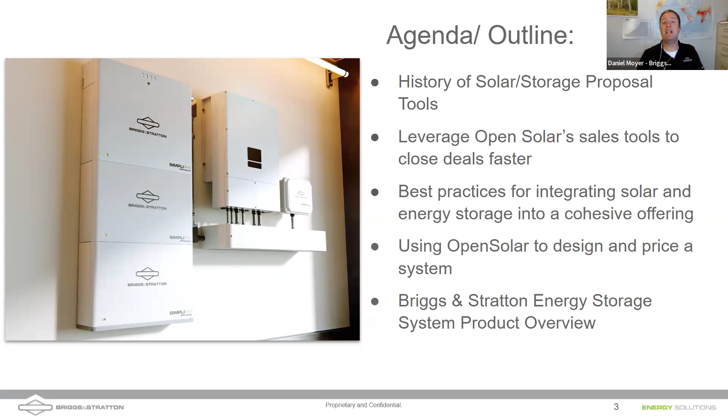So really quickly, the agenda, the outline: we're going to talk about the history of solar and storage proposal tools, how you can leverage OpenSolar's tools to make deals happen and close deals, which is exciting for everybody in this busy industry trying to get onto the next job. Best practices for integrating solar and energy storage together into a cohesive offering, and then Andrew is going to walk us through a demo of the tool. I'm really excited to look at that and go through that. Then we'll end by looking at some of our products here at Briggs & Stratton Energy Solutions, not only our batteries, but also some of our generators as well.

So Andrew, you want to walk us through a little bit on OpenSolar and your history? Yeah, thanks Daniel. OpenSolar, we've been in business globally for a number of years, but in the US we've been active since about 2020, 2021. We're the world's leading solar design and proposal software, currently used in over 150 countries globally. We have teams in Australia, the UK, Europe, the Philippines, and of course the US. What's really unique is we've got a coast-to-coast US sales and support team, but being a global company, we provide truly 24/7 global support coverage for our platform.

What's really unique about us is that we're free of charge for the installers. We've got a lot of great partners and manufacturers, groups like Briggs and Stratton who help support OpenSolar, but we're free for the contractor. The way we generate revenue is integrations and partnerships, so finance deals run through the platform, or permitting and engineering services. There's a lot of different ways we generate revenue, but the great thing for installers is it's free. If you utilize any third-party services, it's the same relationship or program you do today, you're just doing it inside OpenSolar. So there's no extra hidden fees or cost - we're truly free for the installer, which is really unique.

But more importantly, we really focus on the community. Here at OpenSolar, we're built by solar professionals for solar professionals. Our CEO, our co-founders, a lot of our staff have decades of industry experience, and we're always taking in the feedback you guys see and experience on the platform and constantly iterating and evolving it for you. So as you get to learn the platform, let us know your thoughts, and we're more than happy to take that feedback and continue to make it better.

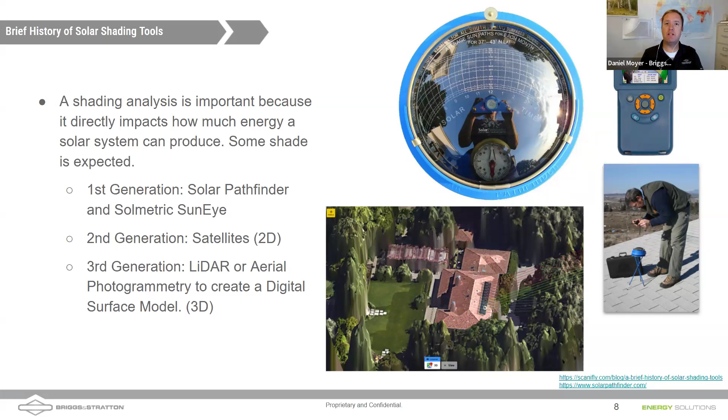And you can see in that bottom picture some of those rays coming off the solar panels. Some are green, some are red - that's showing you where you're getting shaded. Andrew is going to share with us later how you can adjust that. So we've come a long way, really exciting.

And what does that really mean for us? It's these new tools like OpenSolar - it's going to streamline the process, it's going to really make these proposal creations go a lot faster. There's a lot of really cool ways that we can engage the customer. They can look at different proposals, and you as the installer are going to be able to look to see their engagement and get live feedback.

Did they click on it? Did they view it? And I think really what we were getting at with some of that imagery is it's accurate now - not only is it accurate for the shading, the production values, but also to be able to accurately show the financial payback as well.

So what do they get? They're going to be able to size the system, we're going to be able to put in our cost estimation, which is then going to be able to look for any sort of potential incentives that are available, and you can add those into the proposal, model that energy savings so that the homeowner has an accurate proposal. So you're not just promising everything - they're going to see when that payback is probably going to happen, that return on investment as well.

I think what made these really cool, Andrew, is with this new 3D LiDAR you kind of get a picture of your home, or in this case what we're looking at is a picture of a business. People love that. And Andrew's going to show us here - you can actually right click and kind of look around and visually look at the house. People love seeing what the equipment looks like on the roof, so they get a great idea of what it can look like.

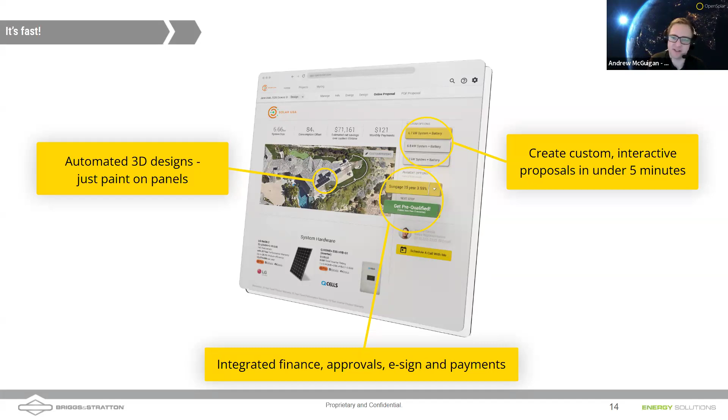And in the proposal, right where you show the solution to your customer, you can sign your contracts. You can actually do all the loan application, credit check, and even get the approval right there in the tool. So you can e-sign all that and even process those payments. Again, it's just a one-stop, really simple place to show your customer the journey, educate them, and hopefully close them on the sale.

Yeah, and that's what's really cool is that you can do this through the homeowner and see what they're clicking on, see what they're taking a look at as well. So one thing that we think about is how accurate is this information, right?

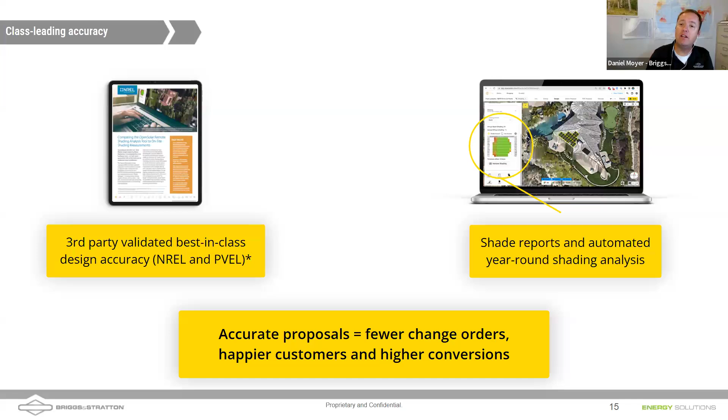And you guys have a really cool couple of third parties, right? We don't have to believe Andrew's word that these things are accurate. Why? Because you guys went out to NREL and PVEL, and you had not only the accuracy of the modeling, right? Is the roof that actual size? Is that tree actually that tall? You were able to show that, and then also be able to model the shade.

And so there's really cool white papers here. And again, everybody attending is going to be able to have links to both of these. These are clickable links, and you can jump in there and read a little bit more about how you guys were vetted by these two reputable organizations to make sure that what you're presenting is accurate as well. So it's an all-in-one, right, Andrew?

Yeah, thanks, Daniel. So again, all on one platform, right? So trying to just create that ecosystem of services for the installer in one place. So we have a CRM that's built in there. We also have the ability to connect OpenSolar with other CRMs, accounting software or software platforms through our Open API, which is publicly available online. It's a web-based browser. That's what you'll see today.

So great for your desktop or laptop, but we do have OpenSolar available in the App Store. So if you want to take this out in the field on your tablet or mobile phone, you can do that. It has all the same functionality and features you get on the computer. And then Daniel mentioned this earlier, but there's a lot of great post-install documentation. So site plans, shading, bankable shading reports, user manuals, install packs. You can even create your own custom documents. So permitting docs, interconnection docs, all that kind of stuff you can create in OpenSolar and even send it out for signature through the app.

Yeah, it's not lost in your computer hard drive, and then somebody else in your team can't find it, right? It's all in one. It really keeps it organized. It helps move it faster, right? So, again, you can do it in person. You can also do remote selling because the homeowner has an interactive proposal. Some people still like a good old printed piece of paper, right, Andrew? And you can still do the PDF and print it out and bring it to the homeowner as well.

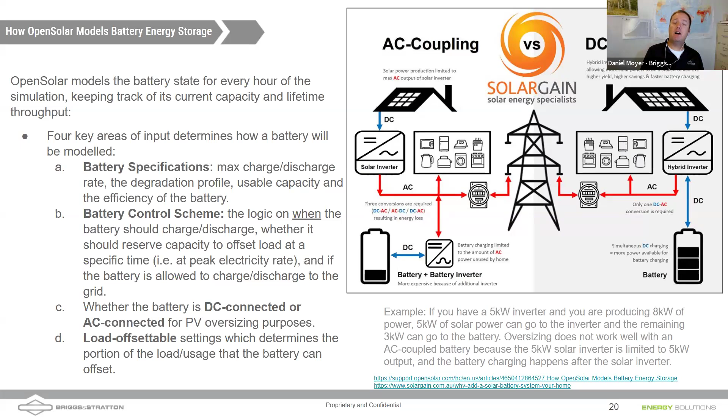Another thing that's really cool you look at is, right, what's the offsettable load? Are we backing up the whole home? Are we just having a critical load center? And then also additionally, how much of that load demand we can offset based on the power of our system.

So Andrew, really quickly, what are we looking at, right? We're looking at the battery control scheme. We're going to tell OpenSolar how we intend to program the inverter. So maybe quickly walk us through some of these different schemes, knowing that there's more available, and there's also customizable battery schemes as well. Is that right?

Yeah, exactly. Thank you, Daniel. And it's all about telling the battery when you want it to charge and discharge and interact with the grid, and especially the utility rate that this customer is under. And it's going to vary based on the state and location, which one you want to use, right? So you got a couple options here. I'm going to highlight this first one for self-consumption. It says in most cases you want to select this battery scheme. I would actually argue there's a lot of cases where you want to be selecting the maximize savings option, and I'll kind of explain why in just a moment.

Self-consumption is trying to mainly protect the energy within the home, right? So you're trying to charge from any excess solar generation that's remaining after you've offset the load, right? So essentially you're trying to fill in the appliances in the home first and use the solar energy for that. And the excess is going into the battery until the battery is full. And then once the load is greater than the generation and the battery's been filled, it's going to discharge to meet any load after that self-consumption.

So if you basically have additional load you got to cover once the solar stops producing quite as much, the battery's discharging to meet that load. And then afterwards, anything else is going to be sent to the grid, right? So it's really trying to focus on storing energy in the battery, covering the load in the home, and then discharging after the fact, right?

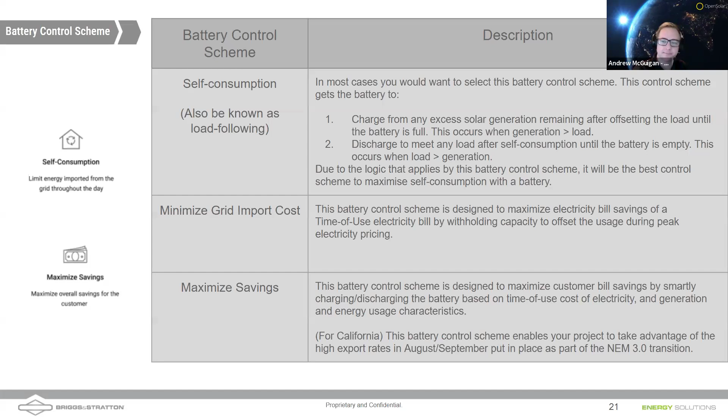Yeah, and I think it's really important, right? You can put this into the OpenSolar model, right, and model this, but it's really important that you, the installer, then program the inverter to behave in the way that you've identified here. And I do know that Sol-Ark and a lot of the other inverters have very powerful controls that allow you to program that Sol-Ark or other piece of equipment to do what you're saying you're modeling to do there. So really cool, awesome.

So what we're going to do is Andrew's going to demonstrate here in a second, but what do you need to know ahead of time, right? You need to have of course the homeowner's name and address, their energy usage, and more importantly their utility rate. And also you really need to know what utility rate they're going to be forced onto after you have done your interconnection agreement as well. We're going to do a system design and sizing, that financial analysis. We're going to create a proposal. We're going to get a contract signed, and we're going to get our money as well.

So, Andrew, why don't you go ahead and take over here, and we'll go ahead and look at your demo really quick. Oh, sorry, I was trying to mute myself there, but sounds great, Daniel. Thank you. I'll take it over right now. And keep any questions coming as Andrew's changing us over here. Awesome. All right, great. You can see my screen there, okay, Daniel? Yep. Perfect.

So yeah, we are in the OpenSolar environment here. There's going to be four main zones here to OpenSolar. I'm going to highlight those really quickly, and we're going to focus mainly on designing, selling, proposing with batteries and with Briggs Stratton products.

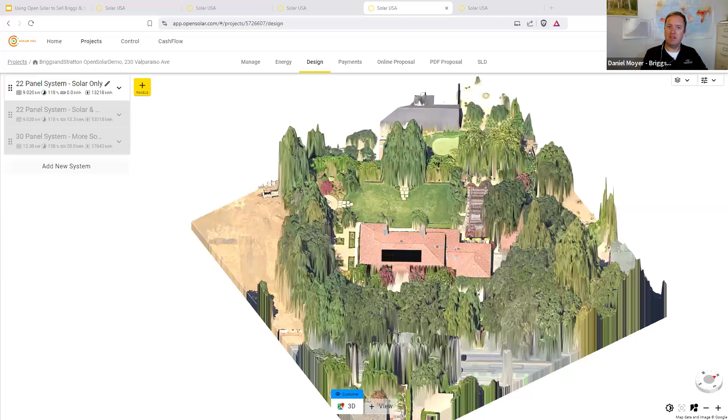Yep, thank you. Exactly. So I've got three pre-built systems here. We're going to take a look as if we were doing this from scratch. So I'll start a brand new system. You just hit the add new system button to do that. Before I get started, I like to highlight that I can right click and hold to move around, or zoom in or out with the scroll wheel on my mouse. You've also got the compass down here that allows you to do that, and you can do that with the plus and minus buttons. The shading icon here will allow you to toggle that on and off so you can see a nice thermal heat map of the property to know the best roof faces to design the solar on.

When I'm ready to design, I just hit the drop down right here. I've got these tabs across the left to build. So I'll choose my modules here. Let's choose one of our partners, Panasonic. We'll choose the panel company. Again, this is my demo account, so I've got a bunch of different options in here. Usually you'll just have the 4 or 5 that your team is selling with. But once I select the panels, I just hit the plus panel button right here, choose portrait or landscape. You'll see the module come out as it's following the roof. And all you have to do is left click to place it, left click on these boxes, or left click and drag, and that will build out the array.

You also have the ability to draw out the roof. There's an auto layout, auto design feature. We also have a straight up AI coming pretty soon, but you have a lot of different options here to help you with that auto design. Now, once you've built this, you've got the ability to flush mount this. You can do a single tilt or a dual tilt if you've got a flat roof. You can also do ground mount systems on here as well. It's pretty easy to do.

You can do carports in OpenSolar, and you've got the basic settings or the advanced settings if you really want to split out columns or rows or set up different settings for spacing, or if you want to do tracking or offsets, we have all those features here in OpenSolar.

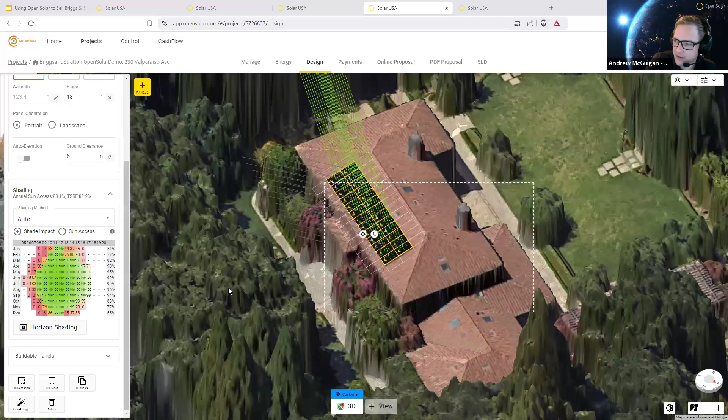But probably the most important feature here that people love the most is our shading tool. So at the bottom of each module array, you're going to have this drop down, which gives you the months of the year, the times of the day, and the average solar access or shade impact. So if I right click and hold, I get these ray tracers now. That's what we saw earlier. And I can look at like July at 6 in the morning, click on that. It shows me exactly where the sun access is coming from and what's impacting or shading the system, even down to the module level. So I can easily see the impact here.

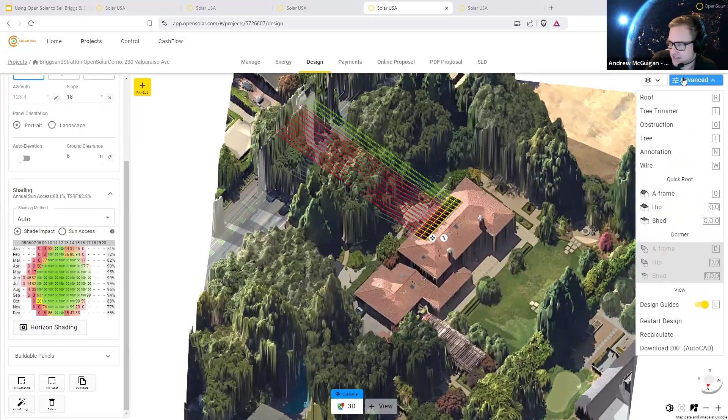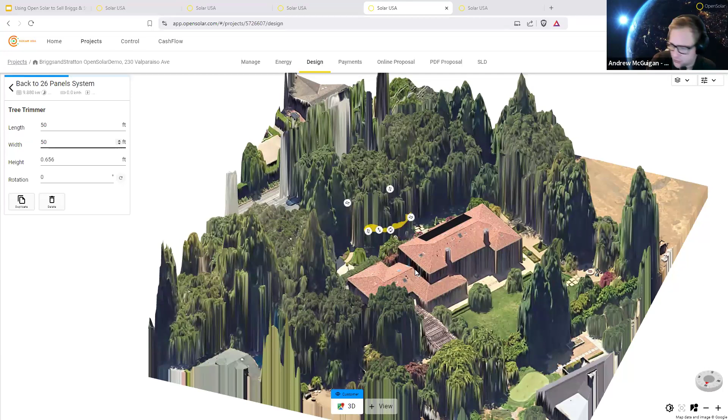And as I mentioned earlier, if I wanted to look at the middle of the day, and let's say this big tree was impacting my system, I can actually come over here to my advanced drop down. I've got the tree trimmer, the tree adder. I can grab that tree trimmer, this little puck, and just slide that puck in wherever you want to chop the tree out. And it'll let me either use the arrow keys or the values here on the left. I can easily type in the values I want. It'll make that puck bigger or smaller. Slide that right in where you want the tree to get removed, and you can move it up or down, and it will chop out or top that tree wherever you put that sliding puck.

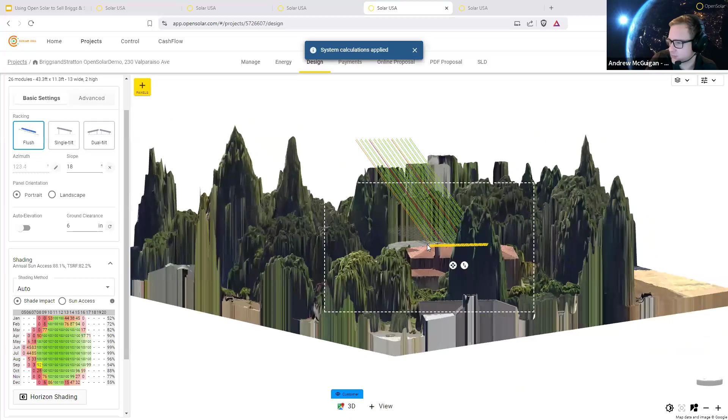So once it does that, I can look at my panels, and it will actually show me what the system looks like if that tree had been removed. Now it takes about 10 seconds. It gets a little laggy when I'm on a webinar here, but if I take a look at that, I've got a lot better production now. Once it loads, you can see I went up from like 86 to 88%. And I can look around at certain times of the year where that tree was impacting the system. And you can see right there, all my green lines where the tree was impacting me there is now not. So a great way to add and remove trees and build out the modules there.

Now we have the ability to do mounting and racking in here. So we have Iron Ridge right now. There are some new racking partners coming. But what's pretty awesome here is once you've done the layout for the modules, you can just do a quick save right there. Once you save it, you can go to the mounting section next, and you'll see Iron Ridge right there. So we'll just let this really quickly apply. Hit import bill of materials.

You can fill in all the information for the project, the type of the material of the roof, the attachment you want to use, the roof shape and the roof height, the rail type as well. You have some advanced fields here, but you can click this button that sends everything to Iron Ridge, builds my whole project in the Iron Ridge account, and I get all my racking right here in the project with my attachment, my bill of materials, and my cost of goods.

So I can save that, add it right to the project, and when I'm done designing everything, I can generate a bill of materials for the whole project with all of my equipment and associated costs, and send that right to my distributor for ordering.

Now the inverter section here, I can do a couple options. I can add the inverter manually, or auto size and auto string it. I have all my different manufacturers in here. Let's find Sol-Ark. I can select the manufacturer and the voltage range, so we'll do Sol-Ark 240, hit auto add best inverter, and that will auto size and auto string the inverter for me. I think that's really cool.

So these inverters have maximum power point trackers, their MPPTs. You can see those little purple lines now that tell the guys out on the roof how to string it as well.

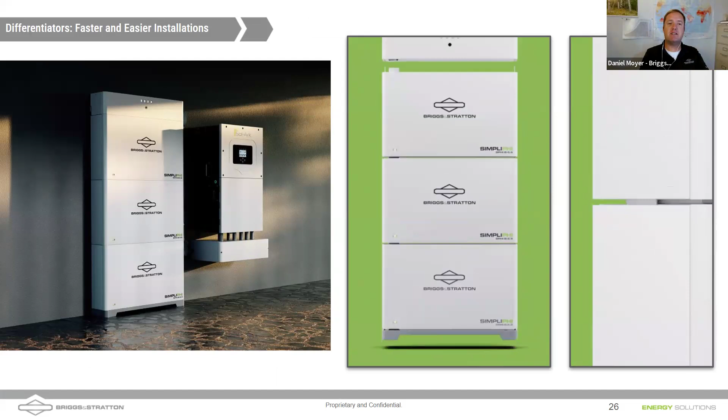Really excited about our new battery, the 6.6 stacking battery. Each module is 6.6 kilowatt hours, and it stacks up to a 20 kilowatt hour system, which comes just under the NFPA 855 threshold. A lot of people call their batteries stacking, but ours truly stacks in the sense that power and communications all connect together through RapidStak connectors.

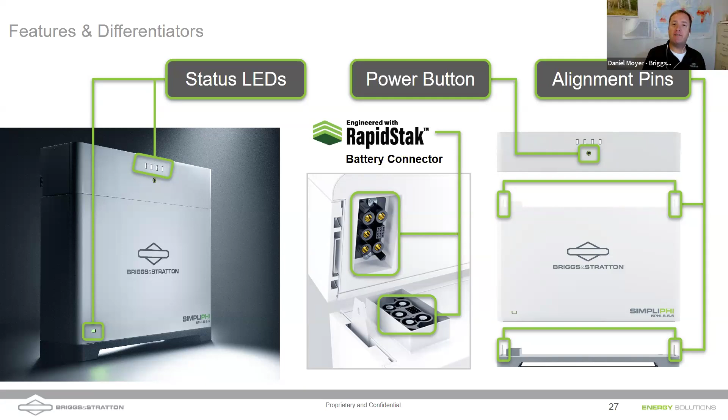We still have a fuel gauge on it, which is really cool. We're not going out to the old power shack looking at the Trimetrics battery meter anymore, we're looking at apps. Of course we have the apps, but we still have a fuel gauge on it to align with that. It's indoor or outdoor rated.

It's really exciting to be able to put this on a wall now. It's wall mountable, and I think looks matter. We do really have a nice looking battery.

I know we're running up on time, so I just want to keep us moving. But one of the things that really sets us apart is our warranty. It's 100% depth of discharge, unlimited cycles, no throughput. You get a 10-year warranty, and at the end of that 10 years we warranty 75% of retained energy capacity.

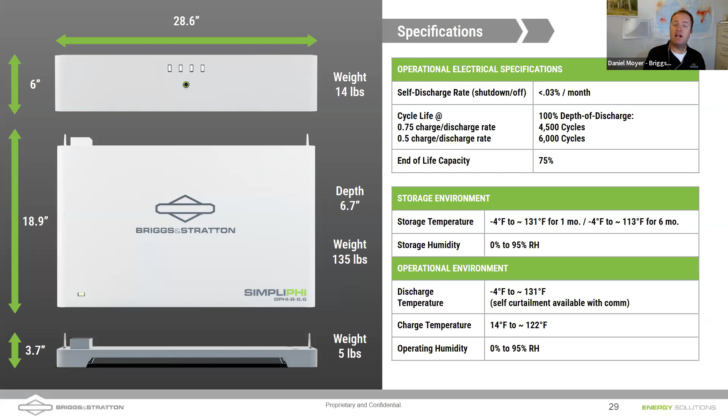Cold weather is always a big factor. We've done some unique things to our batteries that allow them to work down to 14 degrees Fahrenheit without heaters. We do have heating options on some of our other batteries as well.

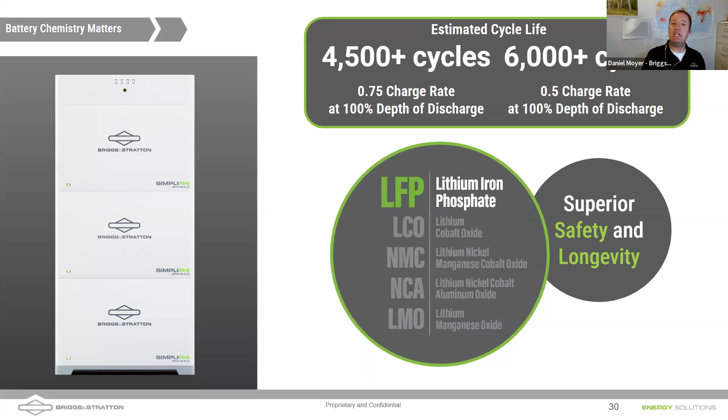LFP, right? We've always leveraged lithium iron phosphate here at SimpliPhi Power. A lot of our competitors have used cobalt in the past, although now everybody I think is moving to that. It gives you that safety and cycle life a lot of people are looking for. You can see some of our estimated cycle life, that's like 16 years for some of these.

You can stack them, right? You can stack them up to a 3-stack, and then additionally you can parallel up to 6 stacks together.

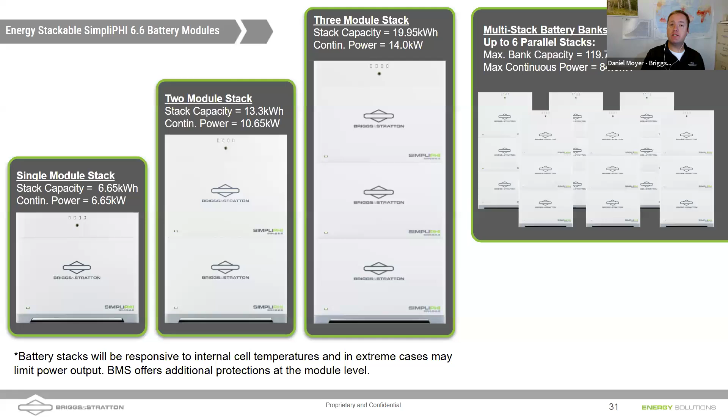We still have some of our other legacy batteries available. These work great in lead acid battery replacement, and additionally we also have high voltage batteries, so they work with high voltage inverters as well.

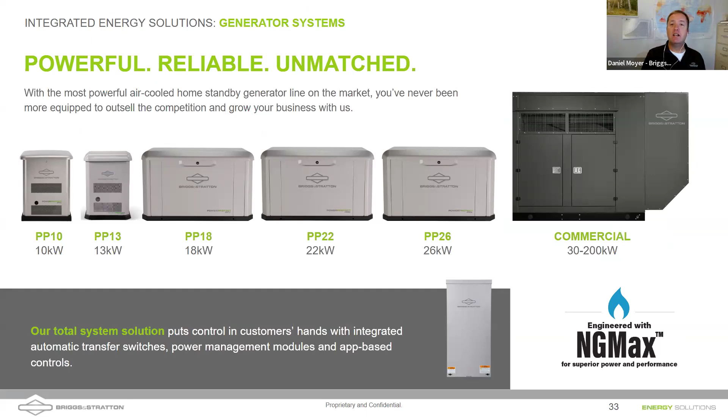Generators, that's what I really think is cool about OpenSolar, Andrew, is your ability to pull generators into that ecosystem. We have air-cooled generators that operate on either propane or natural gas, and then we have some liquid-cooled generators for larger commercial systems.

I'm really excited about the 6.6. It's an innovative, easy to install program. We've got great apps, we have a really well-known brand, probably a lot of you have a lawnmower. World-class company, US based, and we're an agnostic battery. We work with many other inverters.